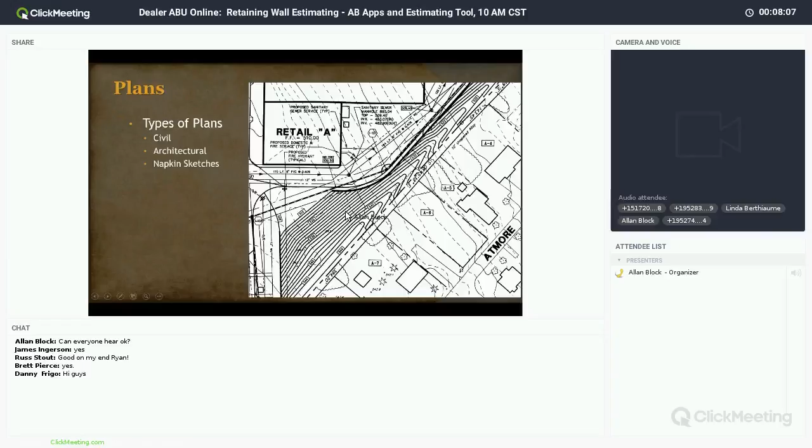We could get more simplistic architectural plans. These walls would be called out, but we created a picture and blew it up to where we can see a terraced application here with two walls. There are some elevations shown here.

But more often than not, I'm sorry? Oh, sorry, I thought somebody said something.

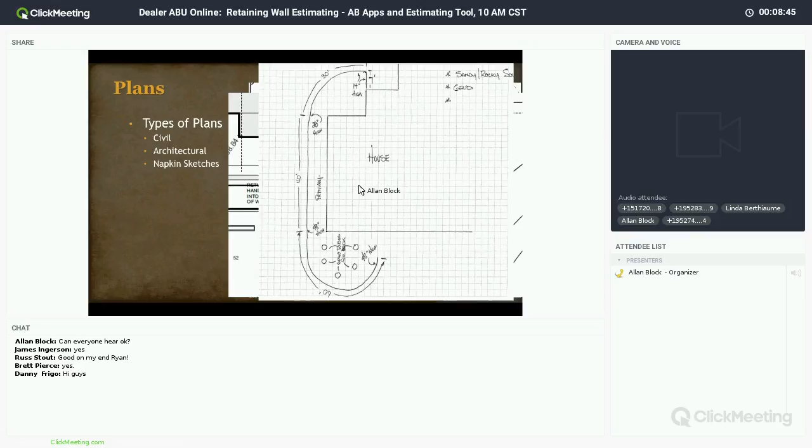More often than not, what we're probably going to get in most of our stores out there, most distribution stores, are more of what we call napkin sketches or hand drawings of what's needed. Maybe similar to this, and I want to reference back to this drawing periodically throughout our session today. This is probably more in line with what we might see, where we actually see a drawing of where the house is and where the wall would be going, so it tells somebody trying to assist them, either a contractor or you as a point of sale, what they're trying to accomplish, and now they're asking for some help.

How can I estimate this? How can I figure out how many block I need? How do I know how much grid I need if I need it? Things of that nature. So again, you could estimate this by hand.

You could get the linear footage that's shown here, calculate the heights of the wall, and start calculating all this out by hand. We do have some calculations in our commercial install manual that will walk you through how to do that by hand. But in all reality, in our technologically savvy world today, we've got some electronic tools that we feel are probably a little bit easier to work with.

So how do you access those? If you haven't ever seen our tools, it's very easy. You can simply go to allanblock.com, click the home page, make sure you're there. Obviously, I'm already there. At the top, you'll constantly see scrolling icons you could click on, estimating tools and apps. You could click that, and it would take you right to our estimating tool page.

You could type in estimating in the Google search, and you'd immediately be provided several different links. You can also scroll around and look through our site. Everything we try to do within two clicks, so if I scroll on down, my eye gets drawn right to it. Under contractor resources, estimating tools and apps, I can click that link, and it's going to take me immediately—everything works a little slow when running an online webinar like this—but it's going to take me to a page that introduces the various apps and estimating tools that we have.

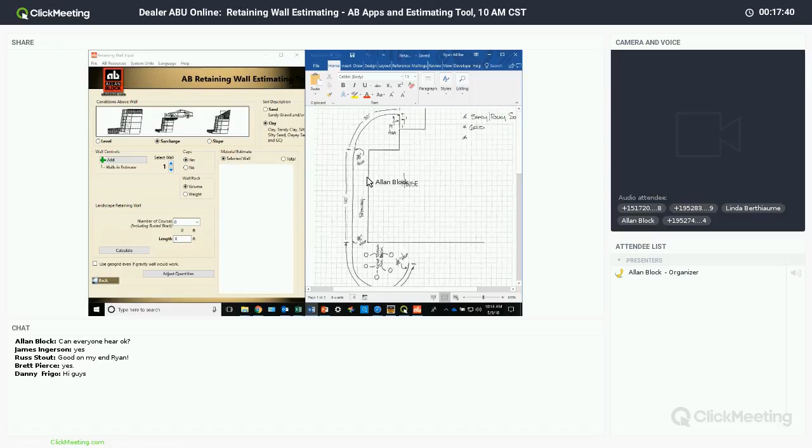If we look at that napkin sketch we talked about earlier, I've got a 30-foot long wall that's 14 inches high at the beginning, and at the end of 30 feet is 28 inches high. It then, over the next 40 feet, goes up to 48 inches high. Over the last 60 linear feet, it's a consistent 48 inches high.

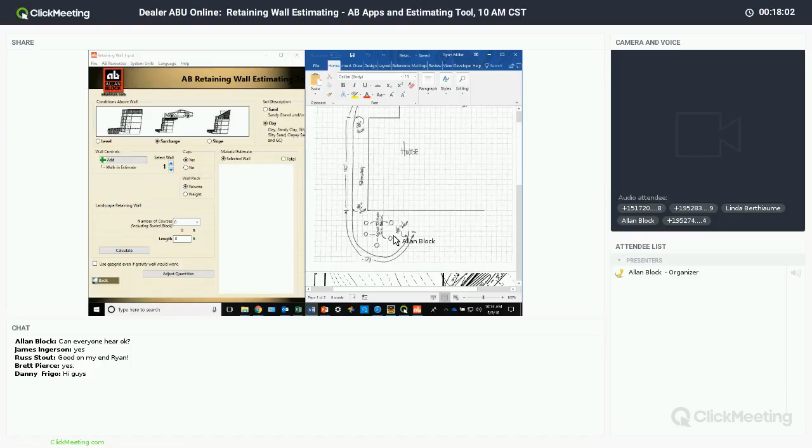So how do I estimate that? With our estimating tool there's a very simple way to do it. There are more comprehensive ways, but I'm going to stick to the most basic way we can estimate that wall here today - breaking this one wall up into 3 different walls.

Let's look at the first 30 linear feet. What is the average height of that section? Roughly 21 inches - it's 14 inches at the beginning and 28 inches at the top. So wall number 1 is 30 linear feet.

I'm going to type in the linear footage there. I don't put in the height - I'm actually putting in the number of courses tall. If it's 21 inches and I'm using my AB Classic, I know it's roughly 8 inches high, not exactly but close, so I need a 3-course high wall. That's going to take me to just under a 2-foot high wall, averaging 21 inches for that 30 linear feet. I've calculated that first wall.

As soon as I calculate that - I apologize, I'm going to go back and forth here a bit so you can see what I'm doing easier - immediately it's telling me wall number 1 is about 2 feet high, 3 courses, 30 linear feet. Here's the square footage. I put a surcharge above it, I had clay, I'm using the AB Classic, and I've got GeoGrid above the first course of block.

Now as I look on down, it's telling me the number of classics I need, the cap I need, 1 roll of grid, and how much base rock, wall rock - all the adjacent materials are listed here. From the labor side, 30 linear feet, productivity 10 feet per hour. Again I put that in as a contractor on the front end, and it's giving me my cost now for everything to actually install that wall - almost $34 per square foot. Whoa.

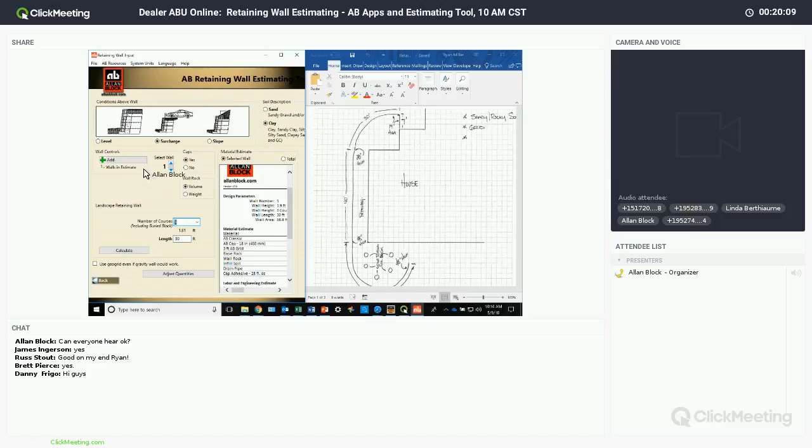Very quickly I can add a second wall. Now I'm on to wall 2, and for wall 2 I've got to make my same selections - is it a surcharge, is it sand or clay, is it a slope - I make my same selections with caps. But now I've got 40 linear feet, so I can type in 40 linear feet.

What's my average height here? 28 to 48 - well, I'm going to say my average height is 38 inches, roughly 3 feet or a little over, or I could say 5 courses, which is just a little over 3 feet, roughly 40 inches tall, over 40 linear feet. I can hit calculate, and I'm going to get the exact same thing for wall 2 as I got for wall 1, just like that. I can add wall 3.

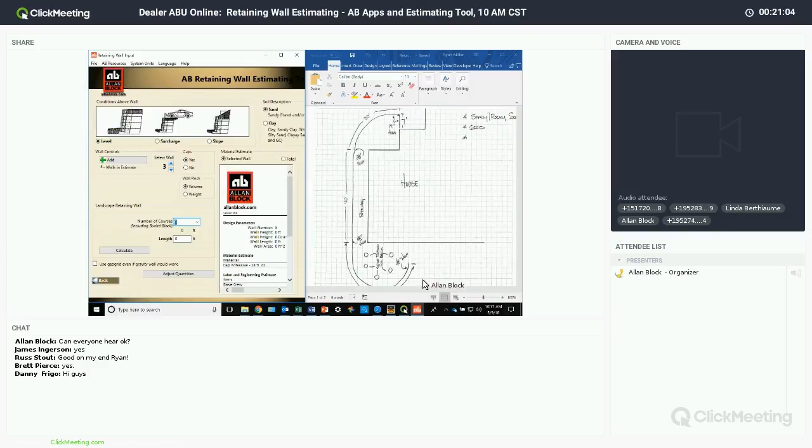What is wall 3? Well, it's really the same wall, but now I'm looking at the last 60 linear feet. Those are all a consistent 48 inches, or roughly 6 courses high. So I'm going to say it's 60 linear feet, and it's roughly 6 courses high, or almost 4 feet tall. Again, we're almost 8 inches in height.

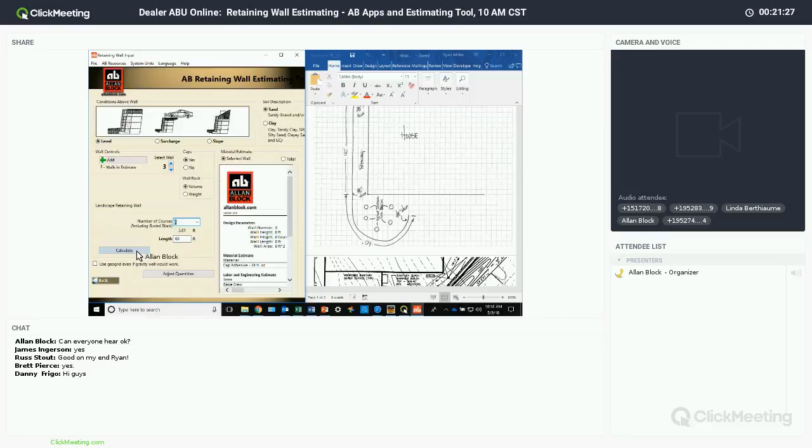I simply hit calculate, and now I've got 3 individual walls that I can look at individually, and I could print from here. I can print each of these and hand those to the customer, or I can go total, and now it's giving me all 3 walls with the total quantity needed. So I've summarized them all so that the contractor or homeowner has a lump sum of what they actually need. As a contractor, I can see each individual wall to price it that way, or see it as a group to know what to charge that customer for this specific project.

So a very efficient, very quick way, and I know I'm going over this quite quickly, but again, we're more than happy to field individual phone calls if you want to dive into this in a little bit more detail.

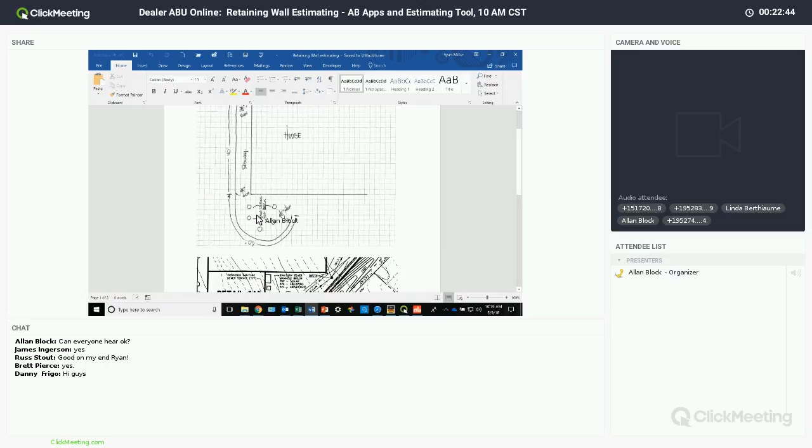So the one thing I didn't talk about is that we make the assumption that the courses we tell the software to estimate with include 1 buried block. On that plan we looked at, it stated the last 60 feet were 48 inches. One of my final questions to that customer before I ask if they're ready to place the order is, does that include buried block? If it does, I run with it at that height. If it doesn't, I need to add an additional course to that wall to compensate for the burial.

And I would simply hit calculate, and now I've got that revised wall 3, and I could do that for every wall. So that's the AB retaining wall estimating tool component of what we're addressing today. Again, if you have questions or comments, feel free to type them in.

It doesn't look like anybody's typed any in yet. I haven't heard anything other than a wow from the crowd, so maybe that's hitting home, or maybe some of you have used that in the past. But again, if you have questions or comments, shout them out, or feel free to call us. Any of us in sales support or engineering will be happy to walk you through that AB estimating tool.

When we're finished today, as soon as this meeting ends, you'll be directed right to our website, to the estimating tool page I showed you earlier, where you can download any of these tools immediately. But if you don't want to do it right then and want to get to it later, go to allanblock.com, and you can find the estimating tool page right there.

This is our retaining wall app. This is a tool that, in my opinion, can be used in a store. It can be used out on a job, maybe by a contractor. Again, educate your contractors on these tools. Get them to use these tools. It can be used in a store or out on a job site.

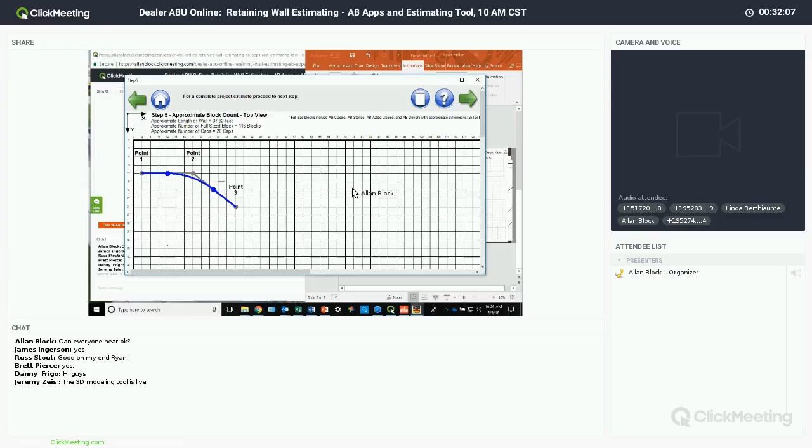But with that, I'm pretty much done. Okay, Jeremy just said that the 3D modeling tool is actually live, so the app actually is creating that extension file as we speak. So download it as soon as I end today.